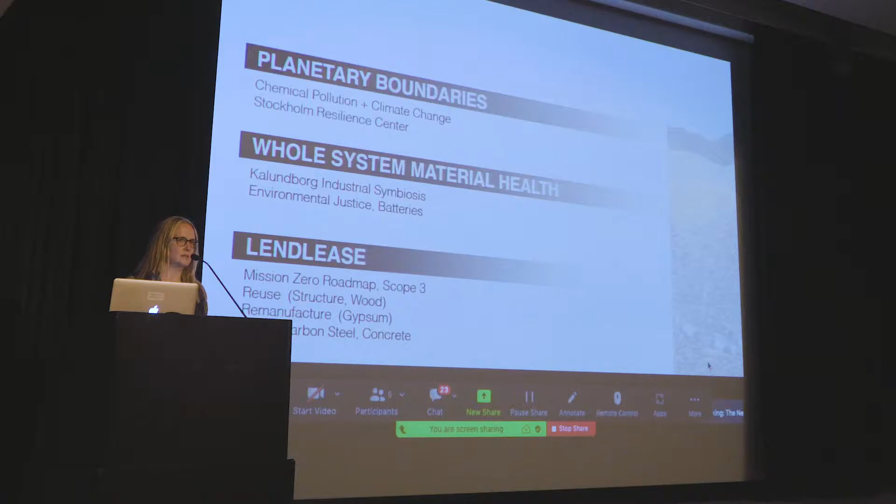Super excited about a lot of what's been broached here today. It's some of these materials and techniques we've been looking into and starting to look at the possibility of piloting here and there. Sometimes we are a bit constrained with some of our building codes, and so we're also looking into how we partner with different municipalities to evolve those as needed over time.

So I like this graphic and its evolution over time. It's nice and neat, and it's neater than it is in reality for sure. But the Stockholm Resilience Center, I believe, started publishing this about 12 or 13 years ago. I just want to draw attention in particular to the novel entities, which is a synonym for chemical pollution and climate change. Those are the two that I'm going to be mostly focused on today.

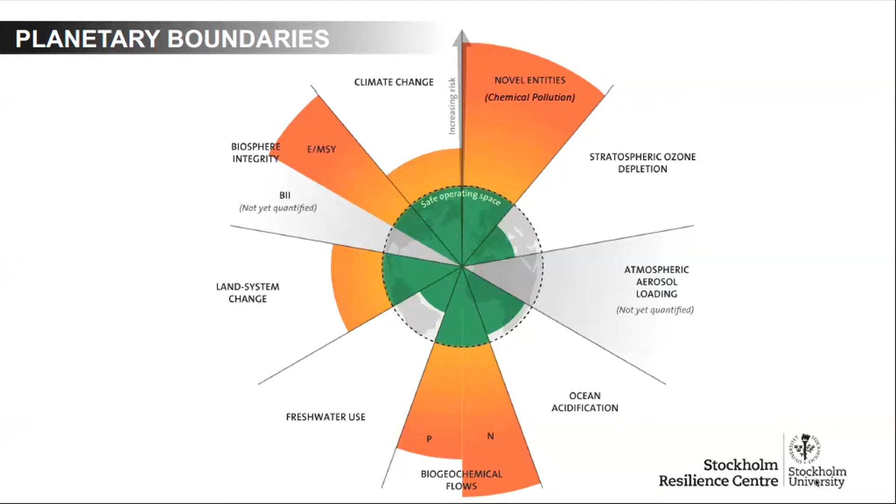But there's been a few reports and articles over the last couple of years, especially just talking about plastic pollution. And there's a lot of synergies, I think, between these two. So when we reduce chemical pollution, very frequently we also are reducing climate impacts and vice versa. So I think sometimes in the built environment, there's trends, and sometimes there can be a bit of myopia in those trends, and we do see that happen.

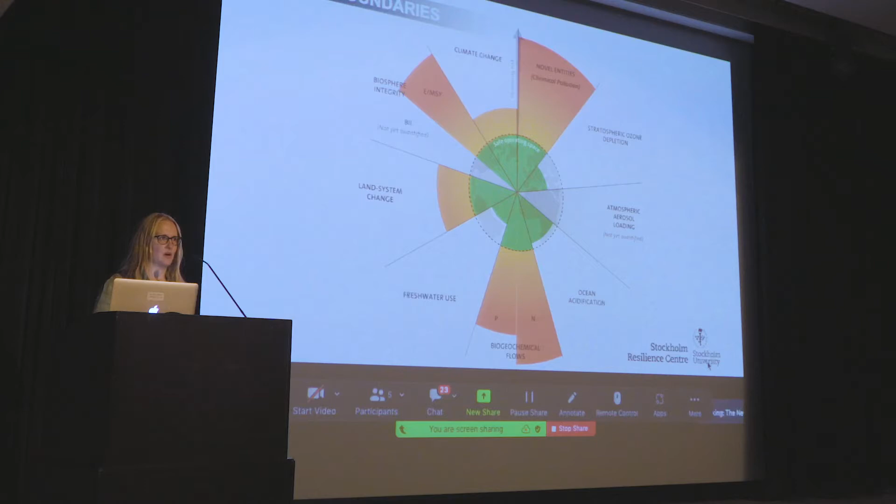Although this group today, I've been really impressed with kind of the big picture outlook on really needing to address across the board all of these considerations.

So this is an overhead perspective on Kalundborg in Denmark. And the reason I bring this up is I think about it a lot with regard to really creating no waste. And by waste, I mean no material waste, no energy waste, no water waste. And this is one of the first examples, if not the first example, of industrial symbiosis.

And it wasn't mandated. It kind of grew up over time. You can see here, and you might not be familiar with some of the company names, but it doesn't necessarily matter too much. You can see the flows here diagrammed between the different companies where any water, energy, or material waste is being taken up by another company within this system.

So a long time ago when I used to talk about some of these issues, I put a picture of a natural ecosystem up on the screen, and over time it felt false to me, because so much of the systems that we're working within are a combination of natural and industrial, or people made.

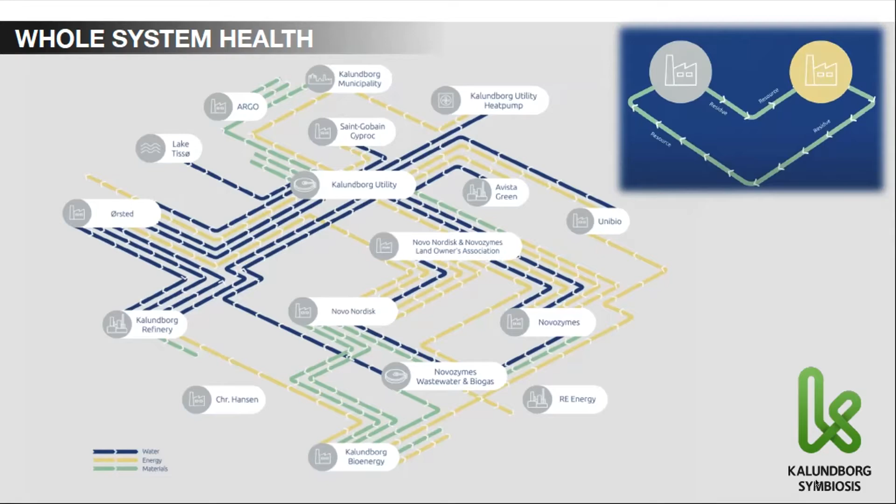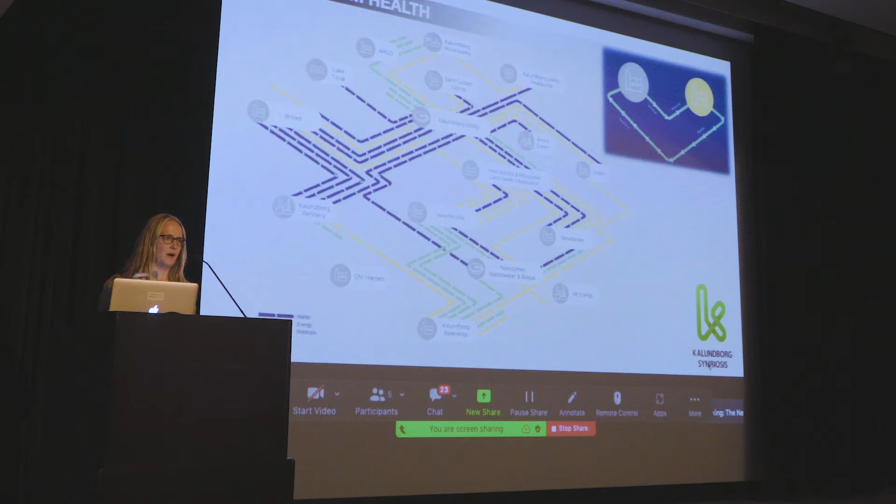And so I think this is a kind of a beautiful thing. Yes, I believe there's still coal-fired power in this system, which is imperfect, but that's something I face every day—there is inherently an imperfection to our supply chains, and we're just all trying to make them better and better over time. I had the privilege to see this in person about 5 years ago, and it's worth seeing.

It might not be one of the traditional tourist stops in Denmark, but it's super cool to see in person, and really see the piping and witness how these flows work on the ground. So conversely, right now we're doing a lot to figure out how we electrify better over time, and that inherently involves energy storage. Recently we've been looking at how to electrify our job sites better and at larger scale, looking at larger energy storage battery units. In order to maintain as small a footprint as possible, lithium-ion batteries are really the most efficient on that front right now as far as what you can actually buy.

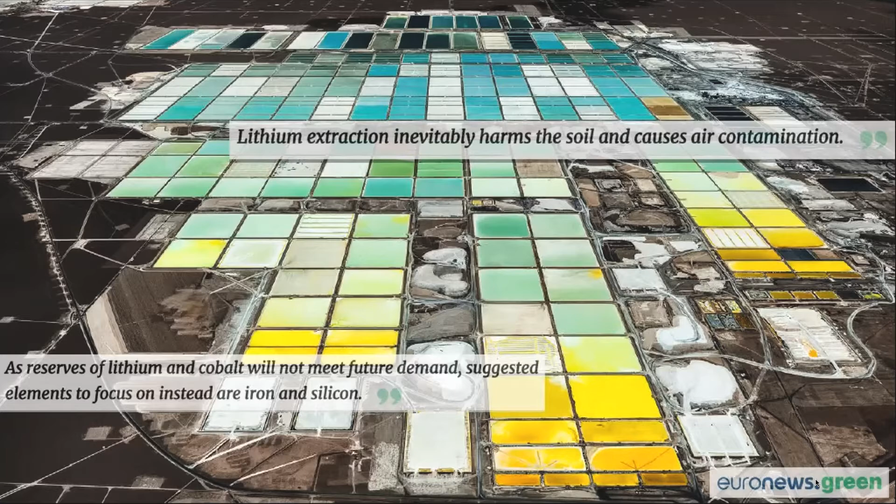However, in looking into this over the last number of months, first of all, if you can even get a lithium-ion battery, there's a lot of baggage that comes along with that if you wanted to see it. There's where the lithium and the cobalt is mined—this is actually in some ways, in the abstract, kind of a beautiful image. But if you look at what the impacts on the ground are, they're not great. There's a lot of impacts to the soil, to the air, and there are people that live not far from here. Further, when we look at where those materials then travel to actually get made into the battery units that we buy, there's a lot that is happening in a black box that we're unable to really understand in sufficient detail to gain alignment with that.

So we're looking a lot at what are some other options for batteries, other technologies. One of those is a zinc manganese dioxide battery that we haven't fully vetted yet, but it's looking a lot better on a number of these fronts, and there's a lot greater transparency into its manufacturing. So it's just been a caution for us internally that it's not just about moving away from fossil fuels and into electrification—you can encounter a lot of similar troubles if we're not careful in how we go down that path.

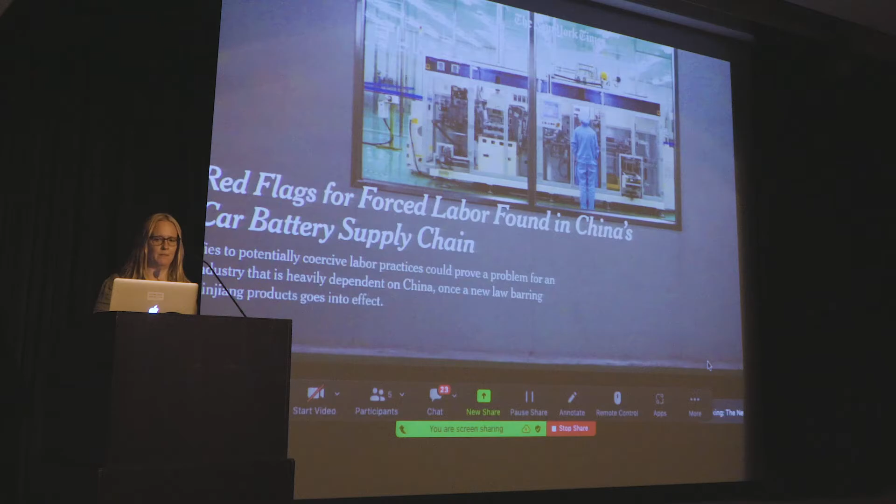So speaking of paths, this is our Mission Zero roadmap at Lendlease. We have the goal of 2025 being net zero carbon, which we've reached already a bit early, and then this is the tougher one, the absolute zero by 2040. This is specific to our construction portfolio that I oversee here. We have achieved this through the purchase of carbon offsets in part, and there is additionality to those carbon offsets that we've vetted—it's mostly a wind farm in Oklahoma, but that's very abstract to our folks on the ground, and it's not yet been possible to make all these other things happen, so that was the way we could get there right now.

But I spend a lot of my time every day focused on that 2040 target, and I'm not going to get a whole lot into the fuels and the power today, but I am going to talk more about the embodied carbon, and mostly about what we're doing right now in the time that I have today. But one of my favorite things is to think about what we can also be doing in 3 to 5 years with some of these materials. So you can see here, I'll be talking about some of the specific materials we're working with to lower embodied carbon.

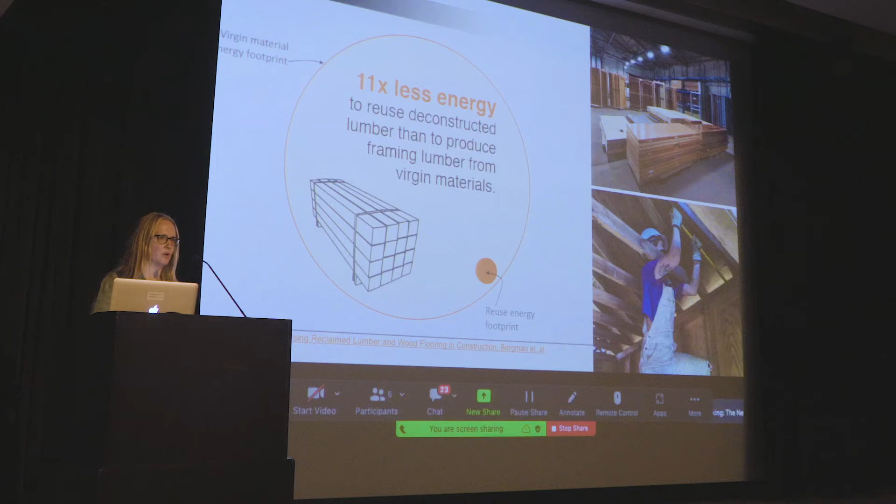And then specifically about some of what we're doing on job sites to reduce waste, because of the impact that also has on reducing embodied carbon and being careful with our resources. So we are consistently looking at building reuse on the whole, and then also some of the internal components. We're working with Sean Regal on the collection of a bunch of doors out of a building that I can't say a whole lot more about right now.

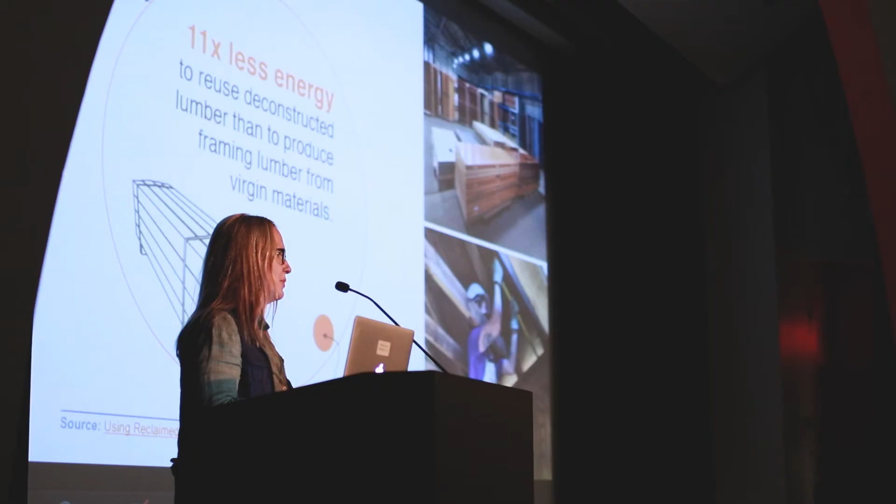It's a project in process that's on a temporary hold, starting again next year. But there's quite a lot of doors in that building that are in very good shape, and Sean from Carpet Cycle is going to be helping us with the removal of those doors and routing them to a company in Pennsylvania called Doors Unhinged.

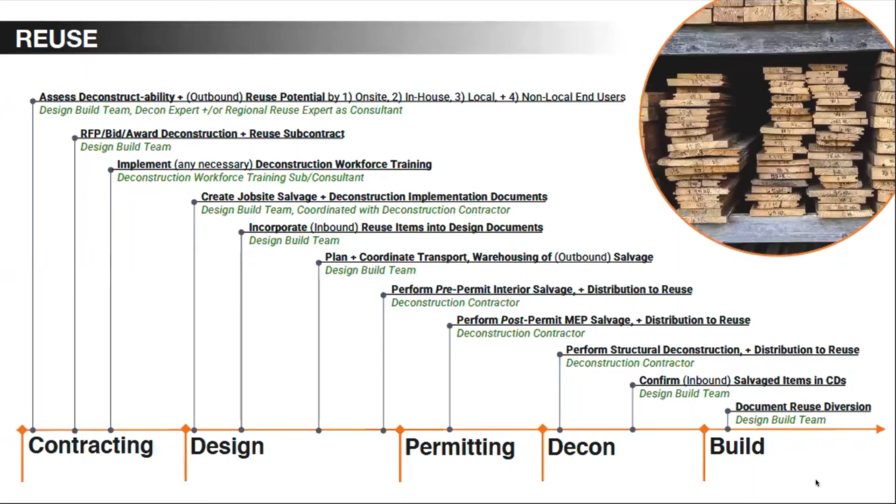That actually refurbishes those and repurposes them into new uses, mostly new doors. This is a lot of words, but a few years back we were looking at helping our teams understand how to not miss some of these really important milestones, especially in the contracting, design, and permitting stages, for who needs to be involved when, in order to make sure that deconstruction remains a viable opportunity to the fullest extent, and the reuse that it affords. So this was just a timeline that we put together at that point.

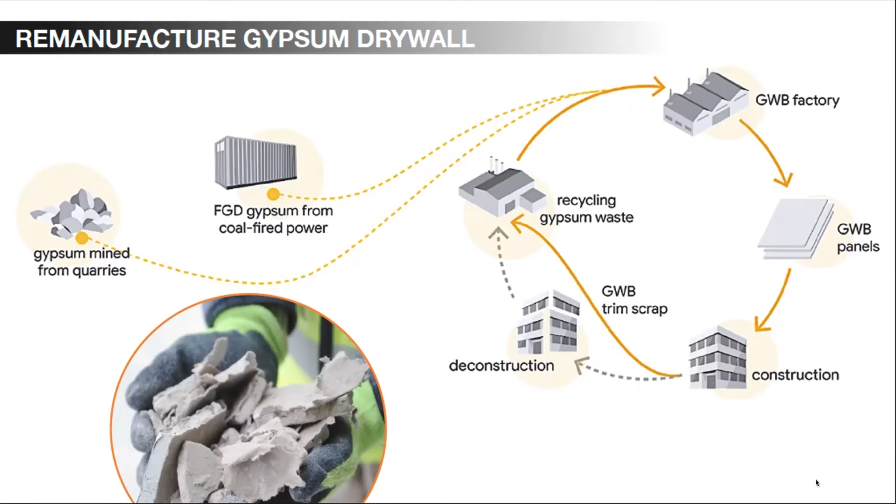With regard to remanufacturing some of the materials that we pull from our jobs, the gypsum drywall - first of all, there's a lot of it on a lot of projects in our urban centers especially, but really on most projects. We have traditionally, over the last couple of decades, gotten a lot of synthetic gypsum from coal-fired power. Because so much coal-fired power is going offline, we are needing other sources of gypsum, ideally not going back to just mining a whole lot more gypsum.

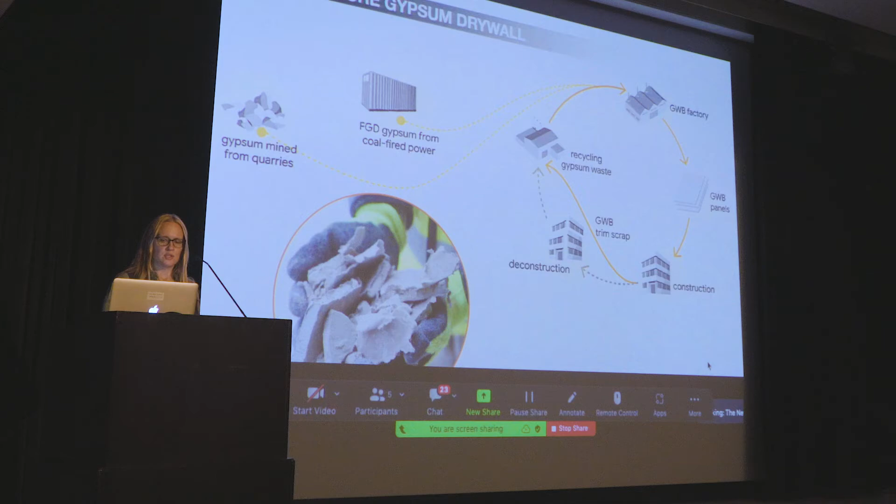So we've had a lot of interest recently. This is something that we're optimistically predicting, and it's coming true, that a lot of those manufacturers would be much more interested once they couldn't have that source of very cheap synthetic gypsum. So another driver, besides just the resource reuse capability and the embodied carbon reduction that goes along with that, is...

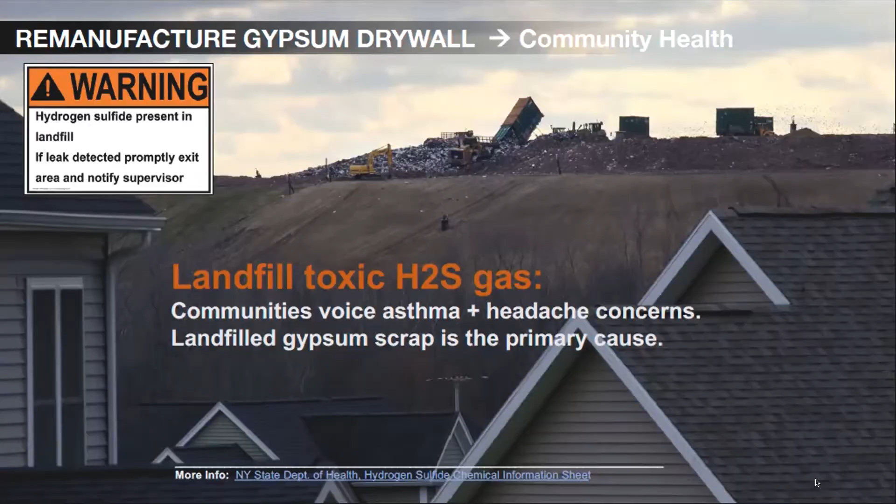that when gypsum goes to landfill, it is a primary cause of hydrogen sulfide gas. And I'm mainly talking about C&D landfills - there's other sources that cause hydrogen sulfide gas to form in municipal landfills, but in C&D landfills, gypsum is usually the primary cause. And hydrogen sulfide gas doesn't smell good, it's kind of that rotten egg smell, sulfuric smell.

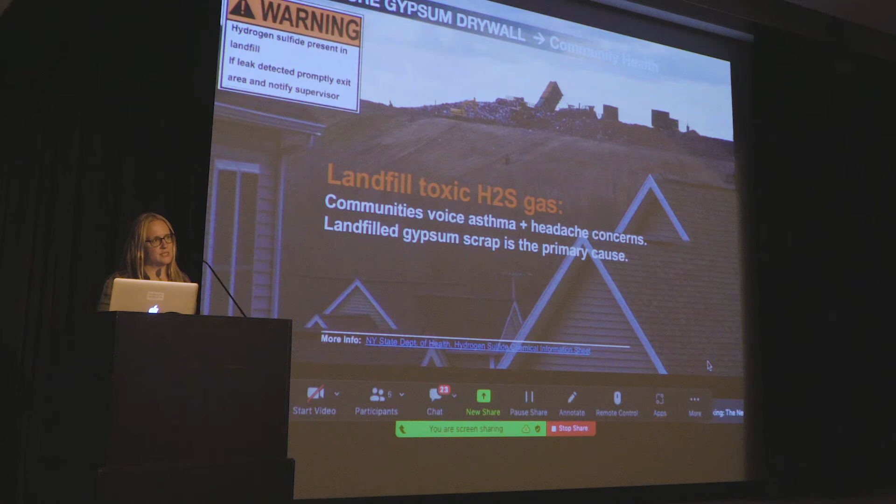But more importantly, it's an asthmagen, and it also causes neurological issues at higher concentrations that are not atypical in landfills. I think a lot of times people don't think about this, don't know about this on a construction site when they have to decide, okay, we're really going to source separate the gypsum, we're going to take up that precious square footage and logistical planning to make this happen. It's another major driver for our teams.

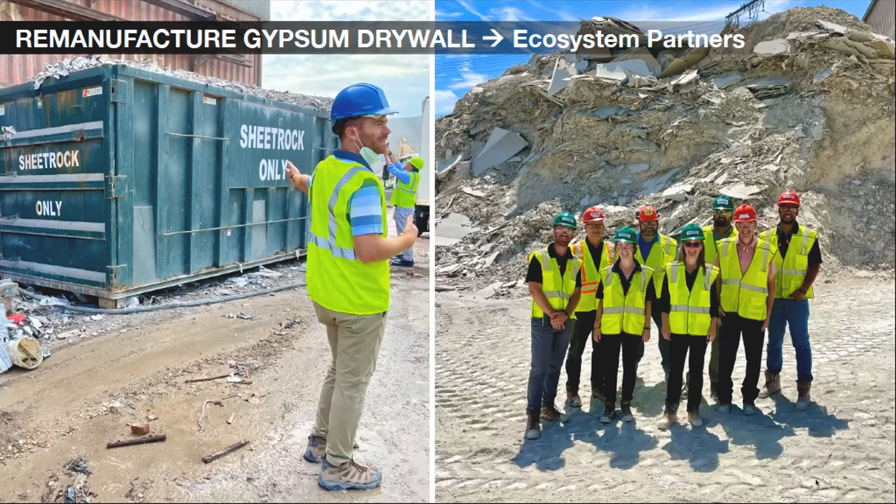So it does take extra planning and careful logistics. We have some great partners in the region - this is Cooper Recycling, who has the capability to receive the drywall source separated so that it doesn't crumble down and turn into fines that are indistinguishable as gypsum and therefore not recyclable. And then this is some folks at Certainteed - they're the only gypsum wallboard manufacturer in New York.

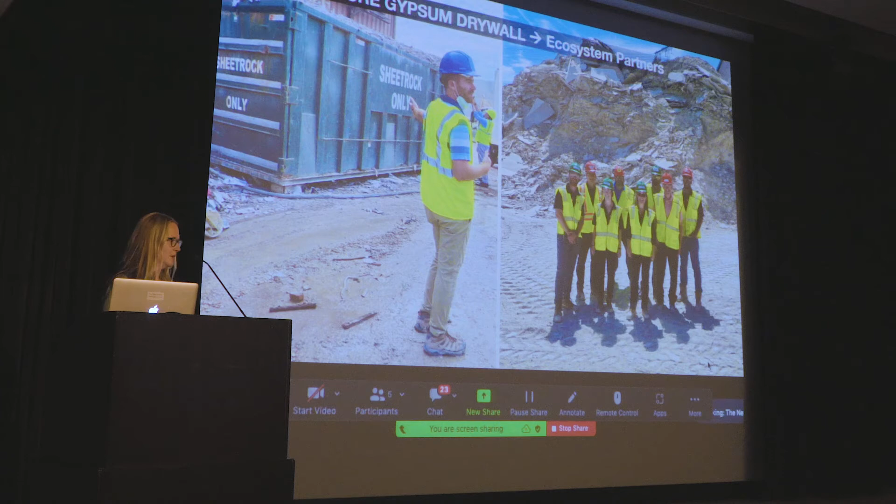They're in Buchanan. They're the ones that just locally reached out recently because a coal-fired power plant that they were supplying material from, or receiving material from, in West Virginia, just went offline this summer, and they're now getting most of their gypsum - I think they were getting 98% of their gypsum from that power plant - now all coming from Spain. So you can imagine they're quite driven to receive post-consumer recycled materials to offset the cost and the material shipments in.

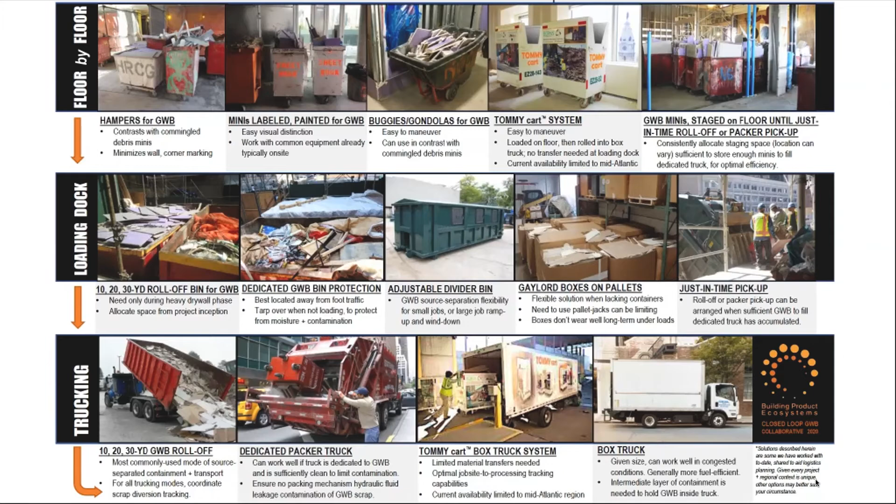Again, a lot of words on a screen, but this is another logistics page, just a cheat sheet that we put together for construction teams a couple years back to help make the logistics planning easier. So these are a number of different scenarios that I've encountered over the years on projects I've been on, for how to source separate, whether you have constraints on each individual floor, at the loading dock, or in the trucking stage of the process. Just to help make it easier.

So, lower carbon steel - luckily these pictures here are from a plant that is in South Amboy, New Jersey. That plant is an electric arc furnace mill that utilizes 97% scrap metal, which is what you see right here when you go visit that plant.

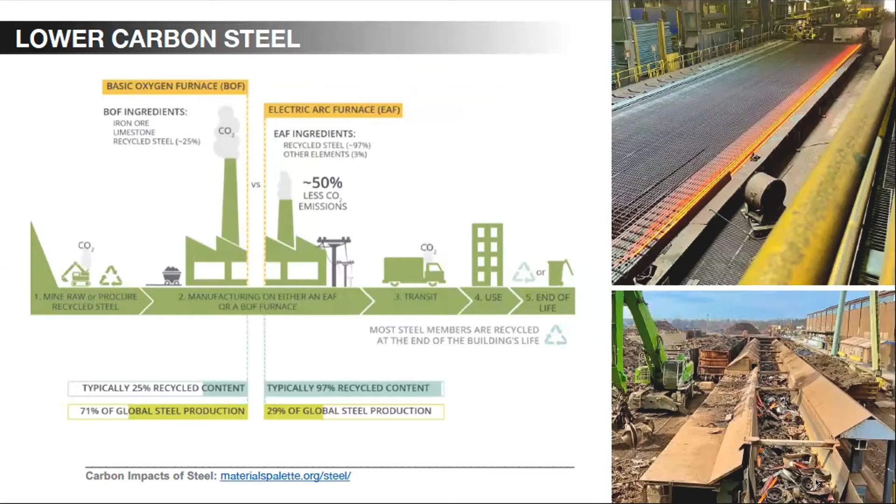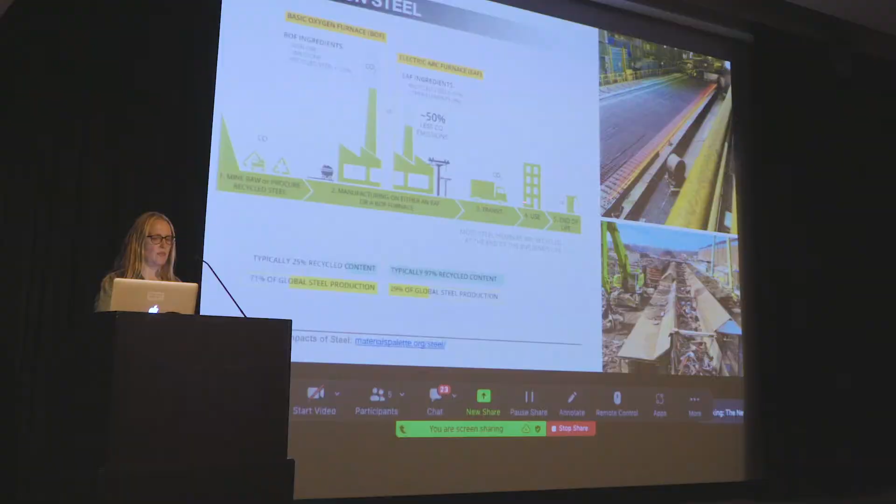Here in the US, a lot of our steel has transitioned to electric arc furnace. We used to use a lot of basic oxygen furnace in the US. Around the world, there still is a lot of basic oxygen furnace production, but there's a huge difference in recycled content and therefore embodied carbon because of the energy involved in that process.

So it's 25% on average, maybe 30% recycled content versus electric arc furnace, which is more like upper 90s. So really big difference. You can see this graph of how that's changed over time. This is US specific. The red is the basic oxygen furnace diminishing, the black is the electric arc furnace increasing.

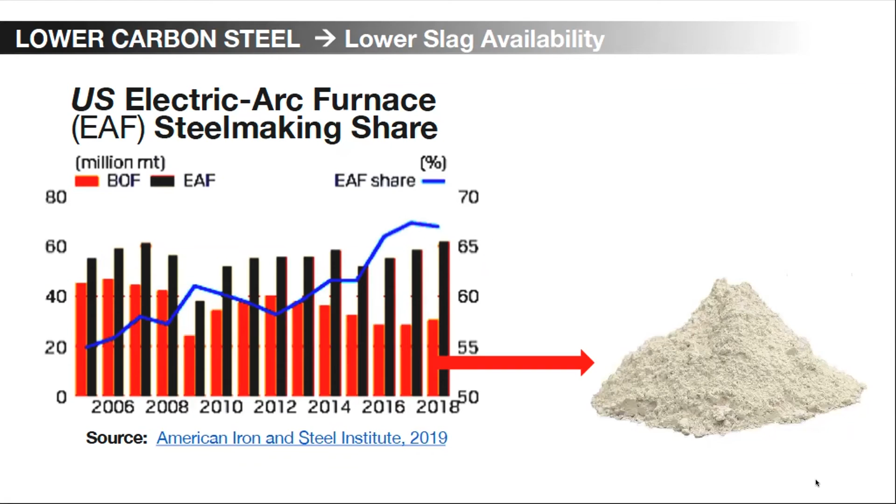But alongside that, we've all heard a lot and used probably a lot of cement replacements over the years to reduce the impact of our concrete mixes. Slag is a byproduct of basic oxygen furnace steel making, iron more specifically. So the less basic oxygen furnace steel making we have, the less slag we have. It's a good thing that steel's transitioning to electric arc furnace, but this is just sort of an alarm that I've wanted to make sure everybody is really aware of.

Cement replacement is a really easy way right now to lower the impact of concrete that you do need to be using on any projects that need it. But those cement replacements, the ones we've been using for a lot of years, are going away. Same thing with fly ash - with coal-fired power diminishing, a very good thing, that fly ash is also diminishing. It's being sourced from storage ponds, but that's usually lesser quality fly ash.

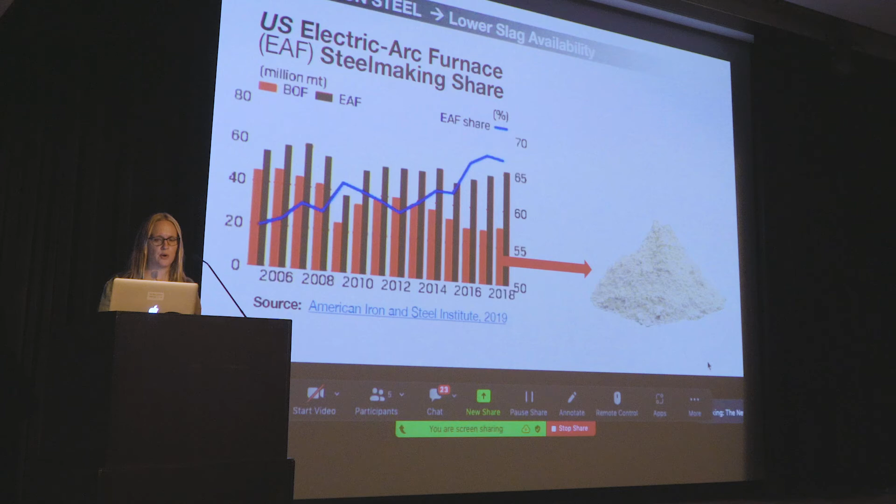You're probably very aware of this, but cement is responsible for about 7% of the global warming potential in world industry. In a concrete mix, it's only around 10 to 12% of the mass of that mix. However, it's responsible for at least 80% of the global warming potential of that mix.

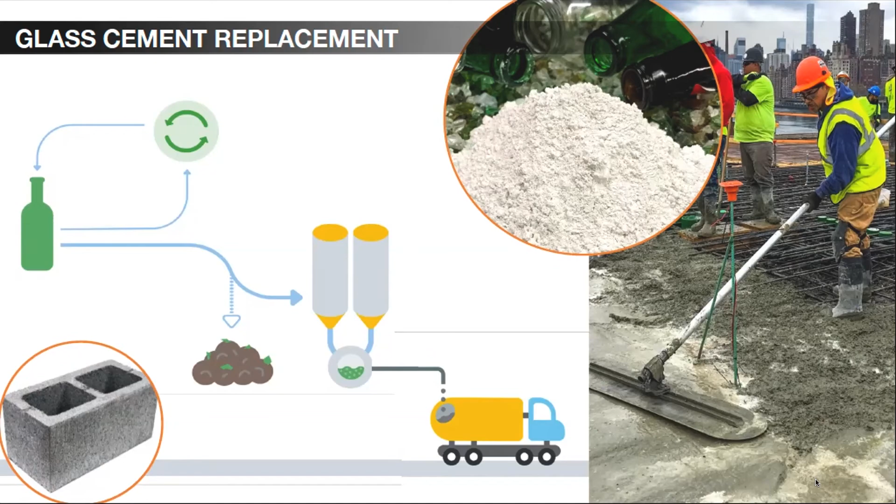And so that's why we're always looking at how do we reduce, either through lower strength concrete where we can use it, where we might be able to use less cement by first of all reducing the amount of concrete needed to begin with, reducing the over design of structure where we do need concrete. So there's a lot of things we can be doing up front before we even get to cement replacements. And then, as you heard earlier, especially in Chris's presentation, a lot of other things besides cement replacement that can and need to be happening in addition.

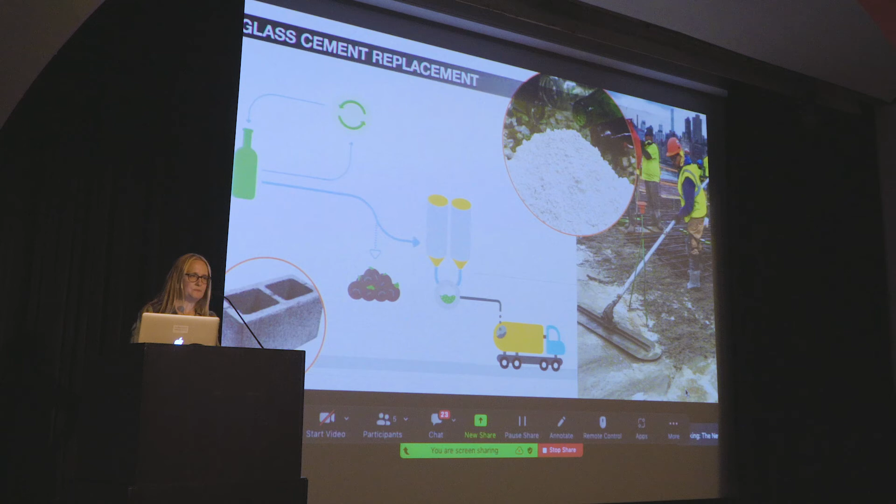But focused on cement replacement for a bit, glass is a material that we were using in concrete block for a number of years, going back 10, 15 years ago, replacing I think about 30% of the cement in those blocks and performing very well. So we started to talk about using that in ready mix concrete as well, because we know that there's a lot of glass available.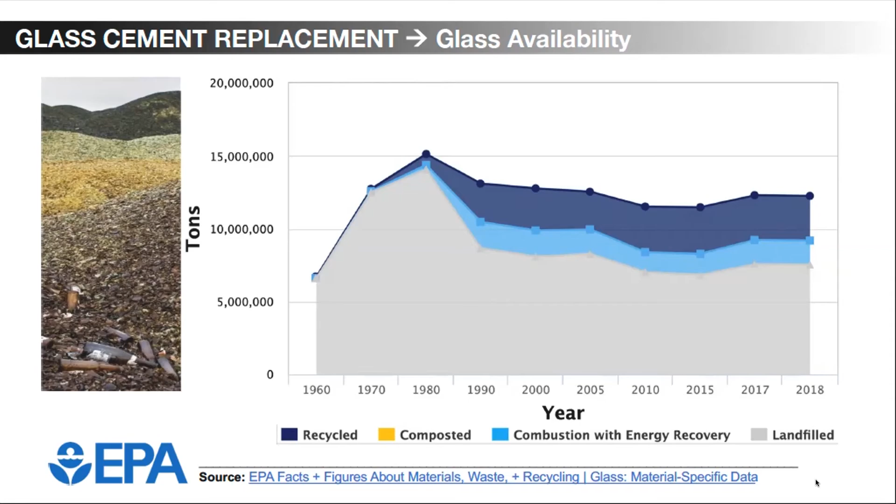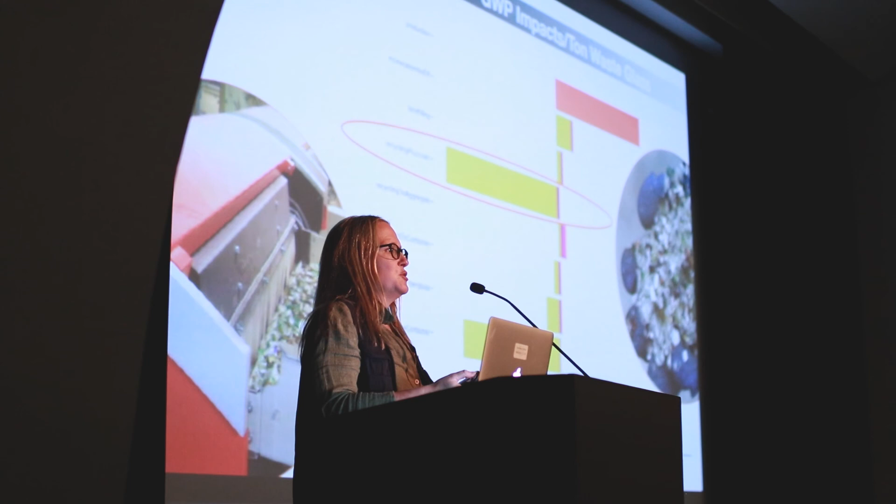Unfortunately, this graph - you can see the blue bars are pretty stagnant. The dark blue here is the amount of glass that gets recycled each year over the last number of decades. So we're not that great about recycling glass in this country. There are other ways to recycle glass. My favorite is refilling containers, but none of us are able to do that super readily often at large scale.

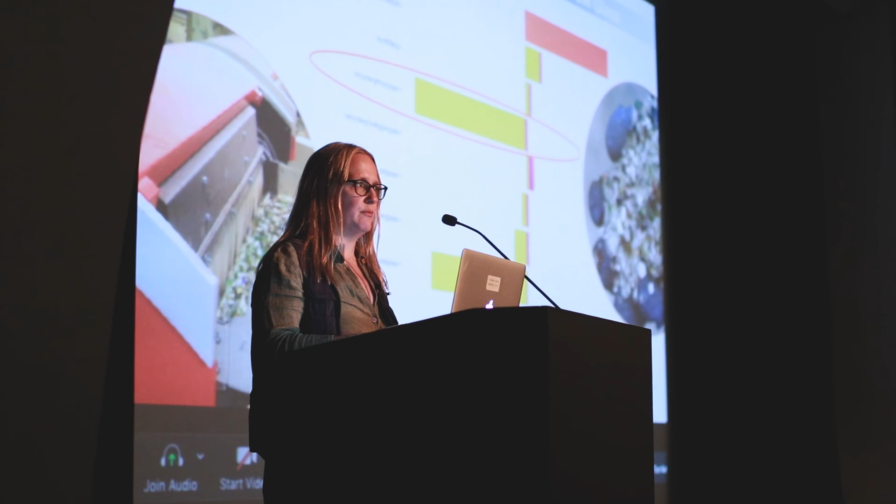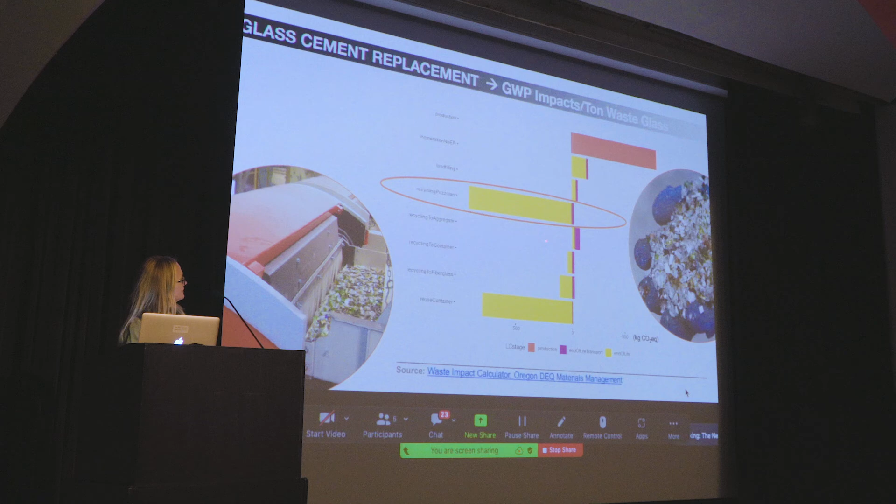And so glass can also be melted down and processed into new glass. However, this study that a colleague, Jordan Palmeri out in Oregon, and his colleagues did was very interesting because of the life of the material that it's getting recycled into. They looked at the global warming potential impacts of different end uses of recycled glass. This is ground glass pozzolan right here, and you can see the reduction in embodied carbon through putting the material into this use.

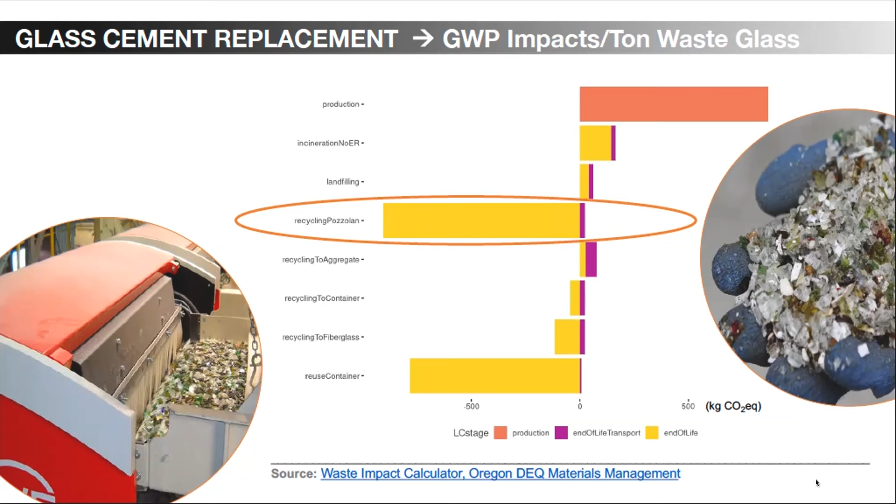So very close behind is reusing the container, but a lot of that has to do with the life of the material that you're putting it into. And most concrete stays in place for a number of years as long as the performance and durability was carefully planned.

So when we're working a lot right now with mixes that are about 40-50% replacement of cement with glass, and that's lowering the embodied carbon by about 40%. Just to quickly emphasize, it's not that glass is so much better than any other cement replacement, it's just that we're seeing it being a bit more future-proof, and that's why we're especially focused on it right now.

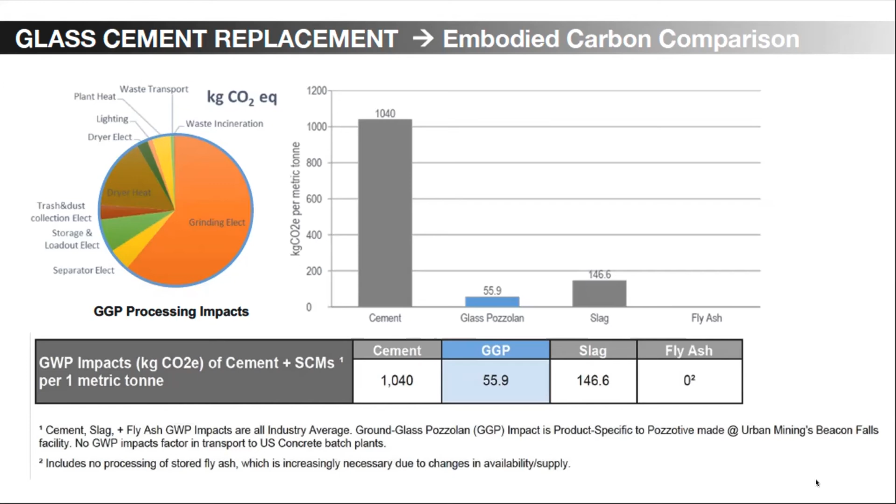Slag is a bit higher in global warming potential. Fly ash is shown as zero here, but this number is before fly ash was needing to be processed more, ground and filtered, so that number has evolved. But really the big thing for cement replacements is to just replace the cement. Most of the impact comes from the grinding for glass.

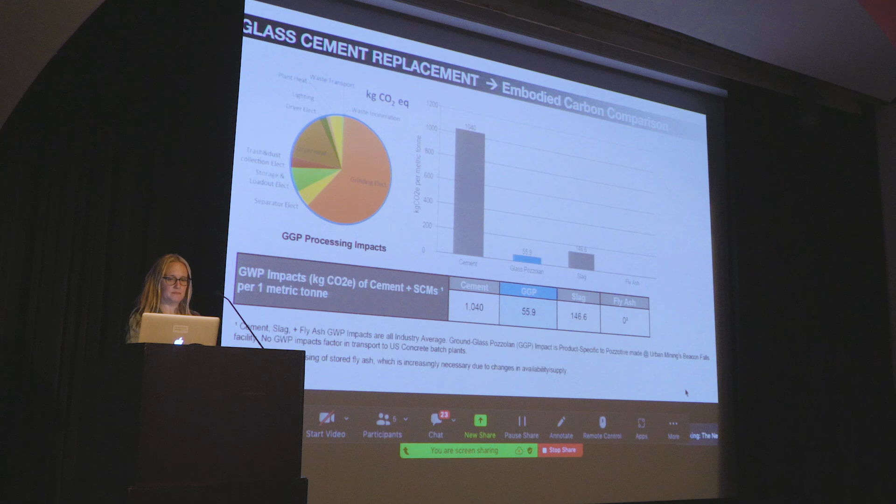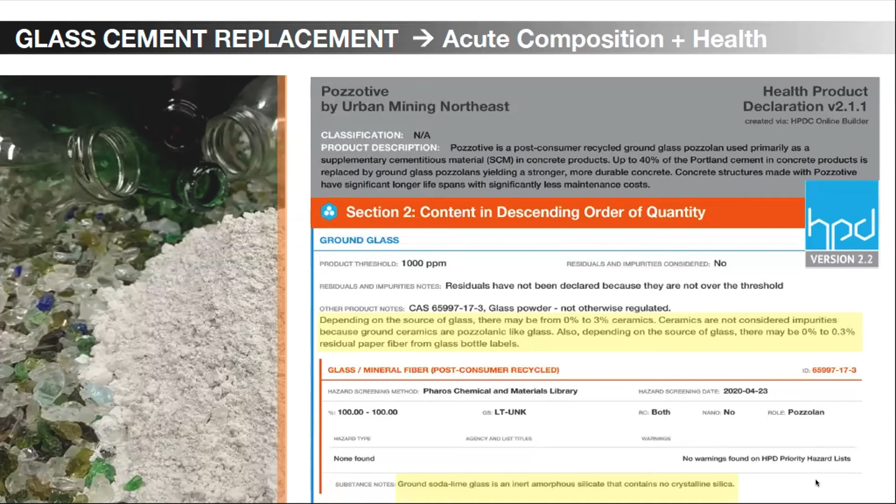So through all this, we're looking a lot at EPDs, we're looking at HPDs also. We wanted to be sure that when we use glass as a cement replacement, we're not creating issues for our labor force. This is amorphous silica, not crystalline silica, which is extremely important. So we looked at that very early on, and health product declarations in concert with environmental product declarations really give you that full set of ingredients and considerations around impacts of those ingredients.

Right now there are on the HPD repository more than 10,000 health product declarations. When this was first put out, think of it as a sort of an SDS on steroids. There's very little proprietary data on these. There is sometimes, especially with liquid applied formulations, a bit more, but they're very transparent. So it's pretty common to see 97% or more that's fully disclosed on these, and it's in a lot of different product categories now.

Just very quickly, to kind of wrap this up, I wanted to touch on the importance of the durability and the performance of any concrete that is used. It doesn't make sense to replace most of the cement in the concrete if the concrete's not going to last for as long as we want it to.

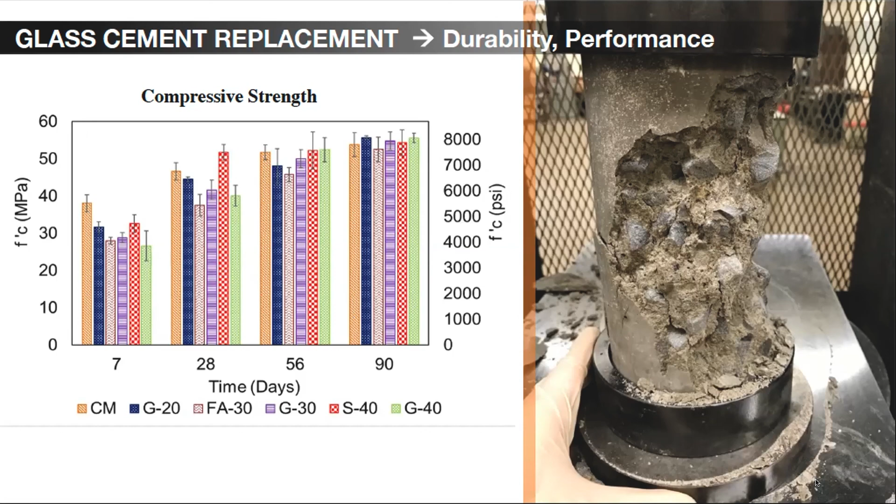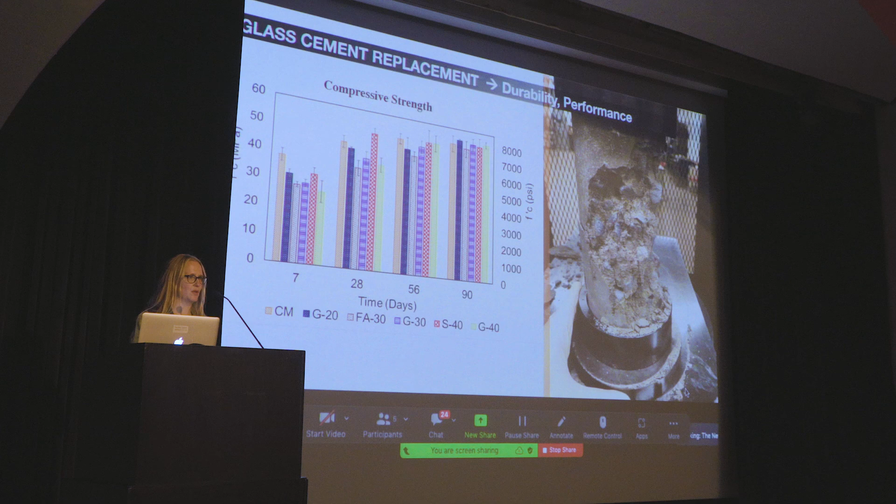When can we look at 56-day breaks, maybe even 90-day breaks, in lieu of 28-day breaks, to make sure that we're using as little cement as possible to begin with, and then replacing as much of that cement as is sensible for the durability and performance.

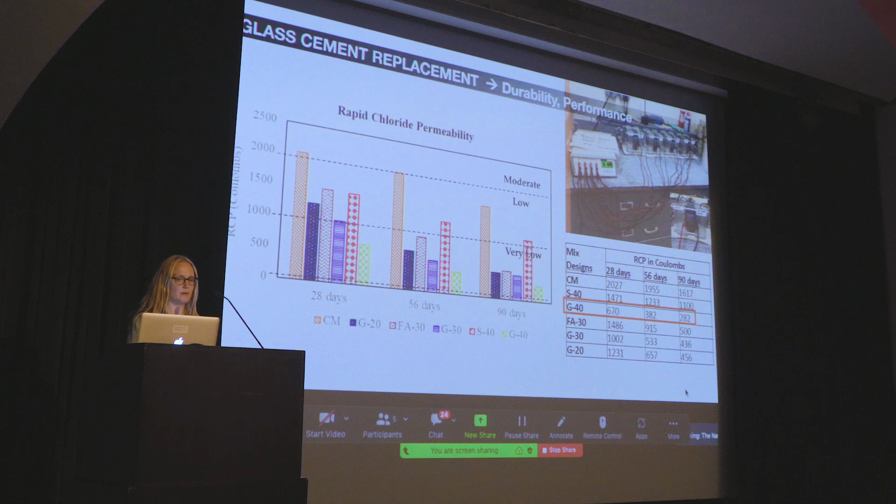And we've been looking a lot at urban heat island effect. So in addition to climate considerations from the materials we're using in the operation of our buildings, also the surfaces around our cities, especially, and the vegetation, and how that interacts to create certain temperatures in different zones. Disproportionately disadvantaged communities are far more greatly impacted by this.

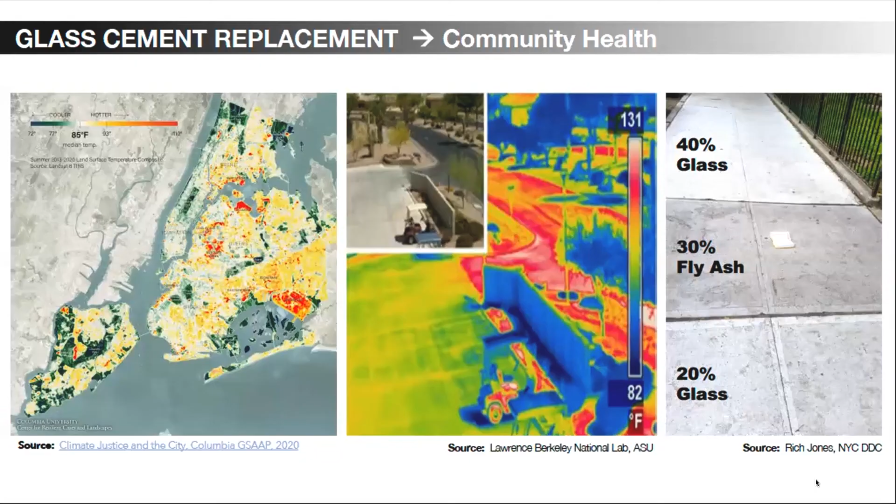So you can see here the mix with the higher amount of glass is lighter. It's not like, I don't know if you guys have walked in front of the Grace building on a really sunny day, it's really, really bright. It's not quite that bright, because we want to make sure that it's not exacerbating other visual issues, but it does reduce the urban heat island effect. It's very similar to slag actually in color. And that is all I have to talk about today.